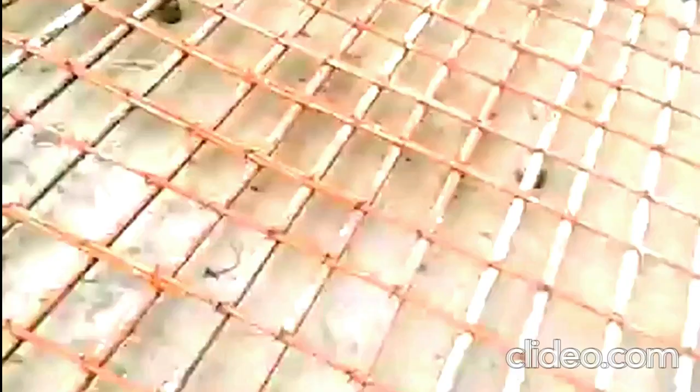In our last video we saw how to bind the reinforcement of the abutment raft. After completing the binding, this is how it will look. If you observe the video, the bottom part of the reinforcement was bound with main distribution and the top was bound with distribution bars. And coming to the upper part of the reinforcement, meaning the upper reinforcement, it will be quite opposite.

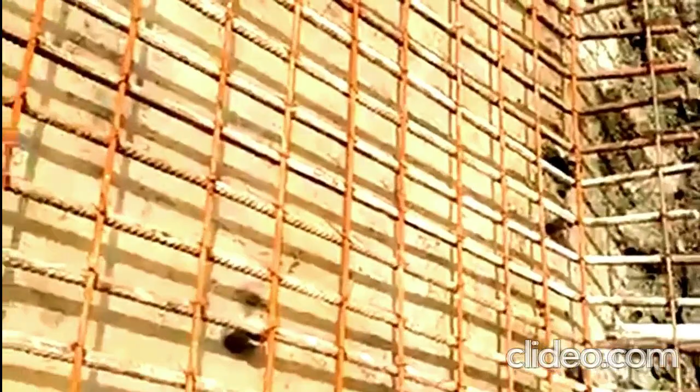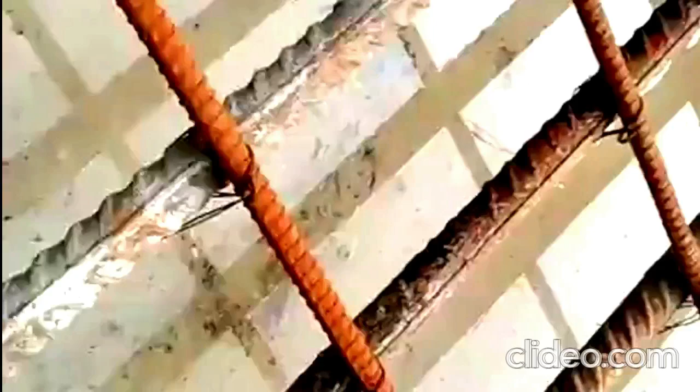After placing all the reinforcement and binding, we have to check whether the cover blocks are placed correctly or not. If at any point the reinforcement is touching the ground level after placing the PCC, it affects the structure's strength. Sometimes we use rocks in place of the cover blocks due to the load capacity of the cover block. The bottom mat has very heavy weight, so in some places we use these rocks, because the stones will not affect the strength of the concrete which we are pouring here.

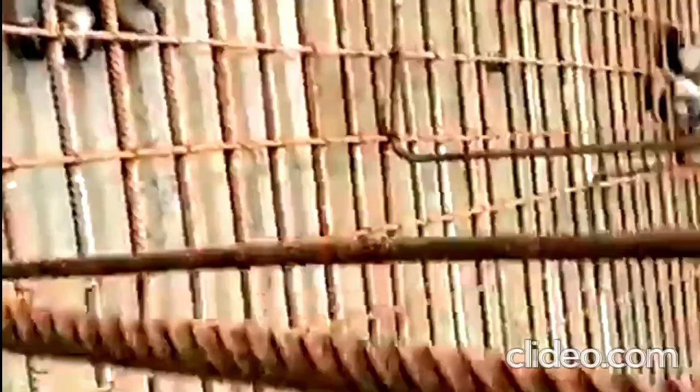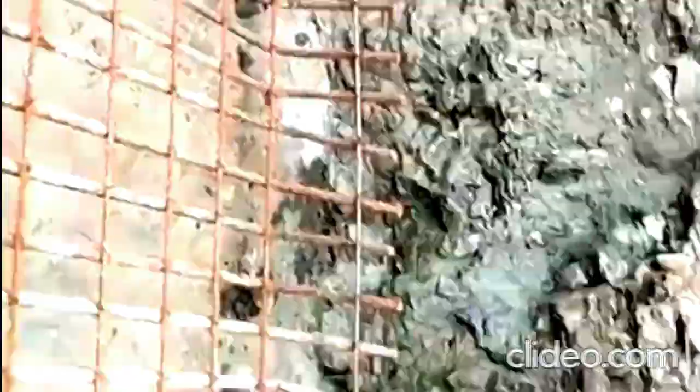So after checking all the inspection parts, we have to place the chairs which support the upper mat of the raft. Before placing the chairs, we have to check all the binding was completed. For every joint, we have to bind with binding wire, the cover blocks are placed, and the bottom reinforcement should not touch the earth at any point. So checking all these points, we are placing chairs.

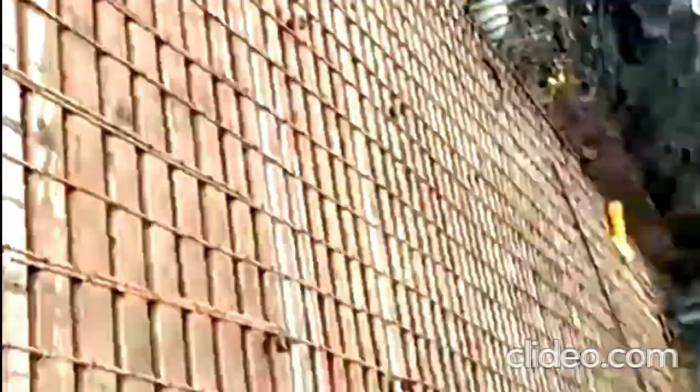To provide the chairs, we need to calculate the exact height of the chair. To calculate it, we need to deduct the covers and the reinforcement thicknesses. If you observe the video, like this we have to place the top bar. After deducting the covers and the reinforcement details, we placed the chairs and then we start placing the top reinforcement. Check all these points.

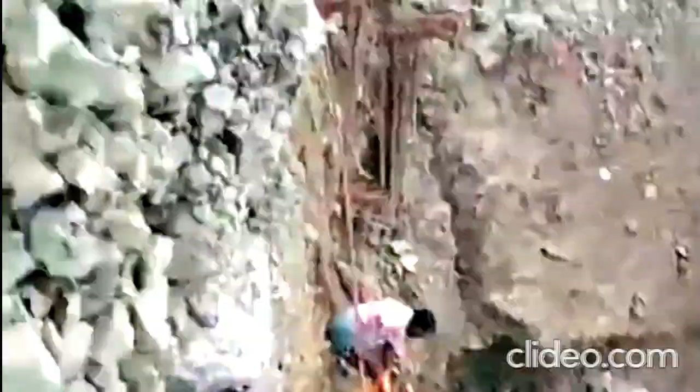We need to study the drawing well. After studying the drawing, the height of the chairs to be provided will be known easily. Here the rectangular portion will be 1 meter and the trapezoidal portion was 1.5 meters. So I am now showing the drawing to you. Just take a look into it. This is the diagram of the raft which we are placing. In this we observe the reinforcement details only, since it is a reinforcement diagram, so the concrete details were not mentioned here. We observe the concrete details diagram.

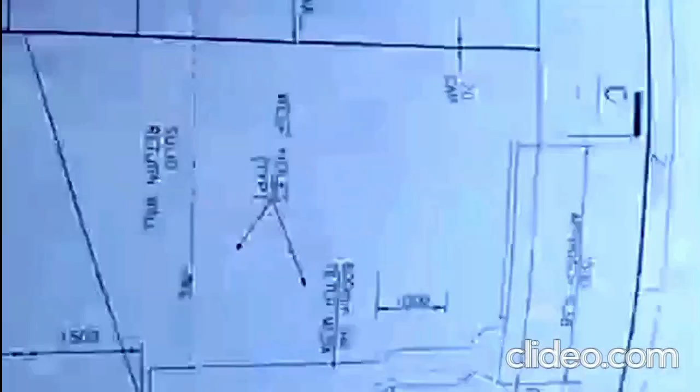The widths, depths and lengths are mentioned on this diagram. How much PCC thickness we have to provide is mentioned here. The 1000 mm rectangle and the 1.5 triangle shape are mentioned here. All these details are mentioned in the drawing. And if you observe the note in the drawing, the measurement units like mm, centimeters, meters are written there.

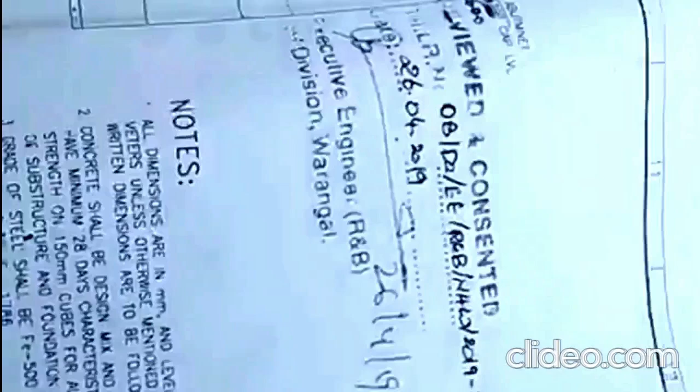By this, the center of the raft will be 2.5, so the center chairs will be up to 2.5 length only. After providing chairs up to 2.5 meters, the top mat of the raft will start binding. The top reinforcement details and how to bind it will be covered in my next video.